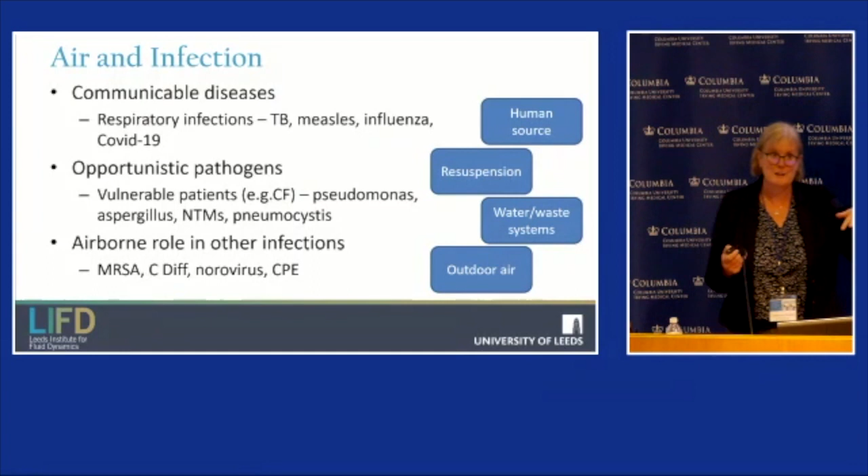So we're not just talking here about human respiratory sources, we're actually talking about sources from water and waste. For some immune-compromised patients, we're talking about outdoor air, we're talking about resuspension off surfaces. And of course, we know that Far-UV can interact on surfaces as well as in the air.

But we have to remember, going right back to the beginning of this conference and the talk that Shelley gave, we have to think of that much bigger picture. So GUV is one of those factors that we can put into buildings, but buildings are designed with a whole raft of different aspects and a whole push and pull of challenges, some of which are there because of regulatory things - net zero, climate agendas, airtight buildings, etc.

Energy is always going to be there. The reason for that energy efficiency will change over time, but that's always part of it. But then there are things that are much more nuanced around human behaviours - things like noise, security of a building. Do you open the windows, or is it secure to do so? What about air pollution inside and outside?

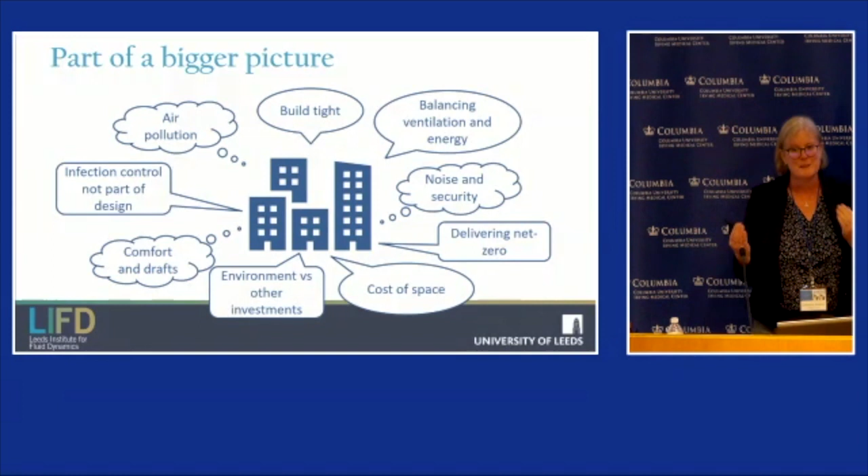And comfort. I don't know if anybody in here has got CO2 monitors. The air quality from a CO2 perspective is really good in here. The temperature looks really good. The humidity looks really good. Is anybody a bit chilly? Yep. So we've got velocities in here which are a little bit too high and you can feel them. So we've got a set of metrics, but they don't always tell us the right things.

So that's the bigger picture space. One of the things in the UK that happened as a result of the pandemic was a piece of work commissioned by our government chief scientific advisor that I was quite heavily involved in. This was led by the Royal Academy of Engineering and called Infection Resilient Environments.

It was a 2-phase piece of work. The first phase was very much emergency - what do we need to do to buildings during the pandemic, what messages do we need to give out to people. The second one was, where do we look to the future?

And we did quite a substantial piece of work around this. We looked with focus groups and expert advice. There was a literature review piece, a research review piece, and a cost-benefit analysis.

The word cloud there, which you can see a little bit of, was some of the issues that our focus groups raised around what poor infection resilience in buildings gives us. Now, bear in mind this was done during the pandemic, so maybe they had a slightly different focus, but there were all sorts of things in there, not just about disease, but things around how it might change things.

For example, you see increased car use. That was public transport, people changing their transport modes and things. We released a couple of documents on this, I can give you the link later. It's a really quite a good read.

But then one of the things that was done as part of it was commissioning a piece of work around the cost benefit of ventilation. This looked at the risks associated with infection transmission, in terms of illness and absenteeism from workplaces and things, versus the cost of putting in improved ventilation. This focused on ventilation rather than cleaning technologies.

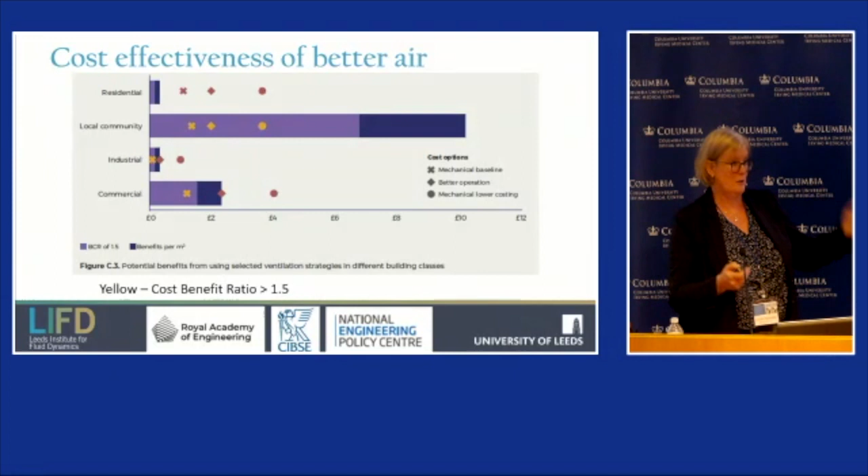So, okay, that takes us, that's that big picture piece. That now takes us into where do we go for Far-UV. And I'm going to go right back to what David said in his talk at the beginning, because ultimately, does it work? Is it safe? Those are the big themes of the entire conference, and that's what we're all really kind of working towards.

And I think, David, you said at the beginning, does it work is almost the first one, because if it doesn't work, the second one is a bit pointless. But we have to know both. And so I'm going to ask the question, well, what do we still need to know? I'm not going to cover everything that we still need to know, because I don't think you could sit there for that long.

But I thought, well, how do we understand Far-UV? Maybe I'm coming to this from my perspective a bit on the work that I've been involved in. We carry out a range of different studies. Some of those are very fundamental, small-scale laboratory studies. How does our microorganisms behave? Or what happens in a very small chamber from a chemistry perspective?

What happens in terms of skin and eye studies, in terms of, again, very controlled settings. And then gradually, we sort of scale it up. Can we go to controlled chamber studies? We go to modeling studies, and then the real world. These get more and more complex and messy as we go through them. So I'm just going to touch on a few points from one or two of these areas.

And the first one I'm going to mention about is inactivation. So a lot of the focus over the past three years has been there because of COVID. We've been looking for, most of us cannot work with SARS-CoV-2, so we've looked for surrogate pathogens. Quite a lot of studies have looked at these. The vast majority of inactivation data is from aqueous solutions or on surfaces.

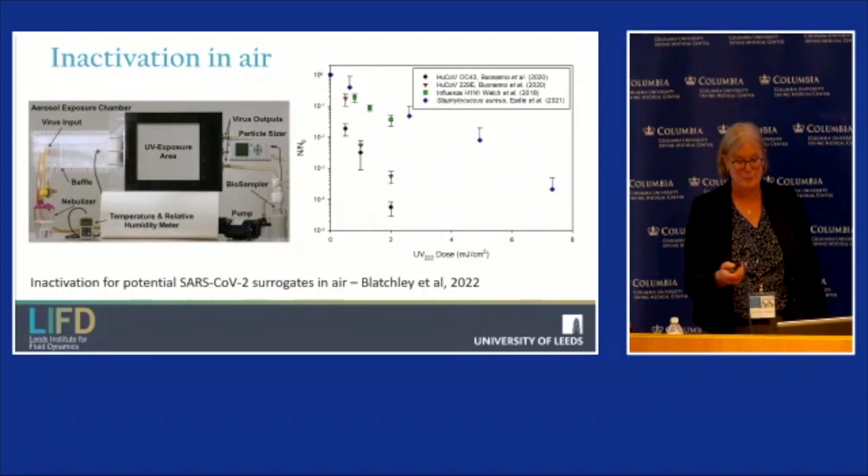And there's actually relatively few microorganisms that have been characterized in air for 222, those which have been a bit more focused around the pandemic space at the moment. We heard earlier in the conference a question about fungi. I haven't seen any fungal data. Maybe there is some out there, but I haven't seen it yet. We haven't really looked at things like temperature and humidity. And if we go back to 254 nanometer, actually there's lots of that characterization happened, but even within that characterization, those flow studies are complex.

As I was putting this together, it got me thinking, and it took me back nearly 20 years ago when I first started working on UV. This was the very first project I ever did, where I was doing computational fluid dynamics models of the flow-through chamber we created in Leeds to determine decay constants for various microorganisms.

In that, we looked at what actually happens in this chamber. What does the flow look like? It was quite nicely laminar in this one, but to start with it wasn't—we had these weird recirculations in there.

On the top right, that's a surface-measured irradiance field that was then put into the model. You can see it's not uniform—you've got this non-uniform distribution.

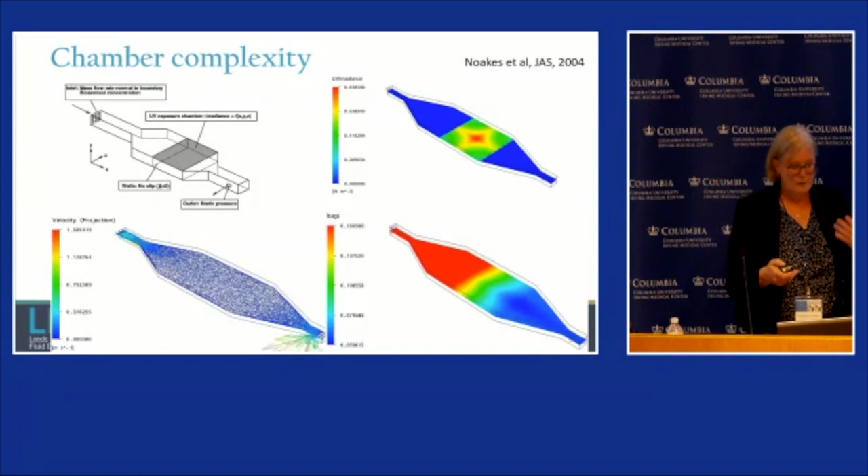So just assuming a uniform fluence rate might not be the case. Actually, in the model, on the bottom right, that's the concentration of microorganisms passing through, and you can see you get a non-uniform disinfection or inactivation rate as they pass through. So the design of the chamber, the flow, and the UV light intensity distribution will determine what inactivation constant you calculate. And that makes it quite a challenge.

So I think this is one of the areas we need to think about, because we need good data for anything we model. Yet how do we compare between different test rigs and different labs? How do we characterize all of those different parameters? There's a huge number of parameters you have to characterize in one of these test rigs to get it right.

Which microorganisms have we done? Which should we be doing to make sure we've got that breadth of information we need? And then what do we suspend it in? Do we suspend our microorganism in distilled water, in Ringer's solution, in bovine serum, in artificial saliva? Do we use a Collison nebulizer that typically generates 2-micron size aerosols, or something else more representative of a human source? What temperature and humidity—do we need variation in there?

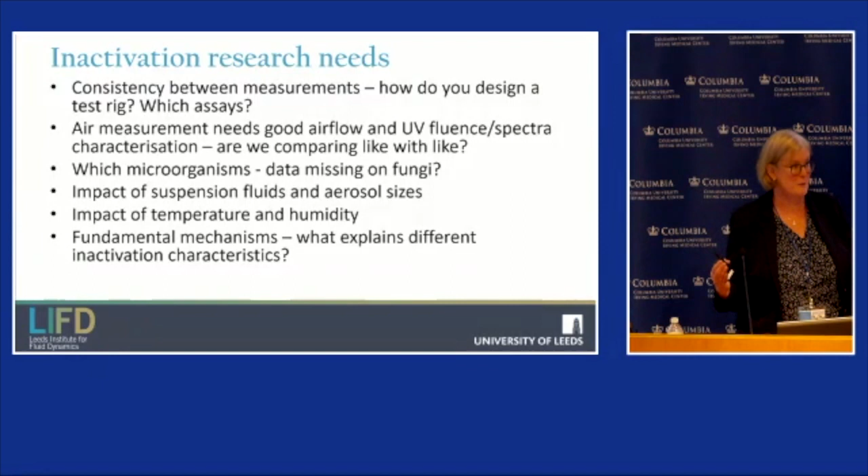And then even within that, we get different inactivations. What are the fundamental mechanisms explaining those? So there's a whole set of questions, all based around what appears to be a simple benchtop experiment, but it's actually a really complex one. That's again why we need to bring all these different places together.

So we've done quite a bit on chambers, room-scale chambers. We can go to room scale. Room scale is great because it's much closer to the real world, but you've still got control over conditions. You can start looking at different lamp placements, room layouts, mock up a hospital room, put different microorganisms in there, and even put some chemical species in there too.

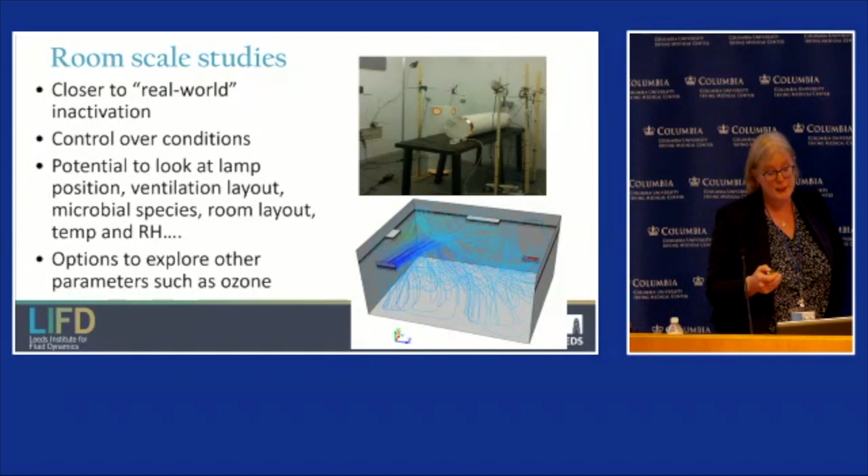These are just a couple of pictures of some of the things we do in our chamber in Leeds—how you do experiments in the chamber.

There are two different ways of doing these. Essentially you are nebulizing a microorganism in—same problem we've got with the Collison nebulizer I mentioned before—but you're trying to determine what happens in there. So we do two different approaches. We usually use what we call a steady state test: we'll nebulize that microorganism into our chamber, which is usually ventilated, so we'll have the mechanical ventilation running.

We take samples when it's under steady state. Even under steady state conditions, we get variation, because the real-world mechanical ventilation isn't steady—it's got fluctuations in it. And it's biological, and as anybody who's done a biological measurement knows, if you measure something you'll get a different answer every time within a boundary. So we get these fluctuations, then we switch our UV lights on, leave it for a little bit, take another set of samples, and we've got two conditions, with and without. Crucially, we keep nebulizing all the way through the experiment, regardless—meaning it represents a room that's continuously occupied, with and without UV.

The second approach is what's often used, probably because of some EPA regulations about demonstrating how we get to 99.9-whatever-percent inactivation—it's a decay test. Essentially you can do a decay in a room, but you have to do a control without a device present to get the natural decay.

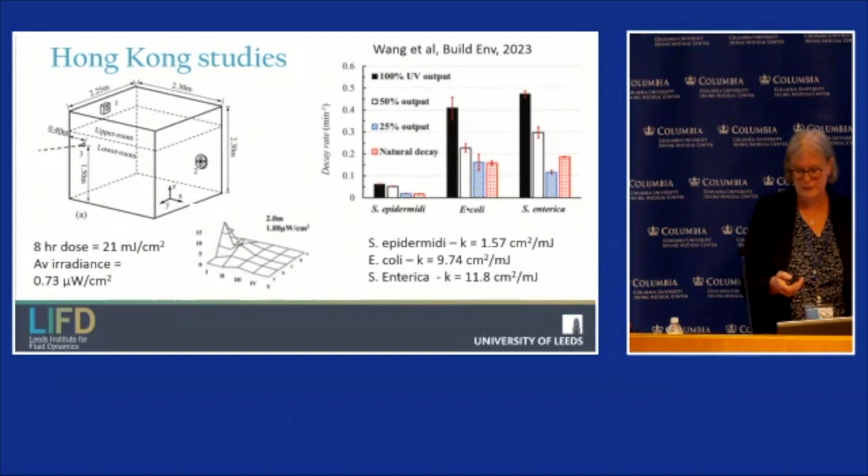And explaining it is really hard. Now, the 2 studies that show that are our chamber, which is ventilated, it's got a mechanical ventilation system, and the air that it's ventilated with is HEPA filtered, but it is just outside air. And the other study is the one that Manuela presented and David alluded to, in the murine virus, which again is a real environment with real air. Everything else is these tightly controlled chambers.

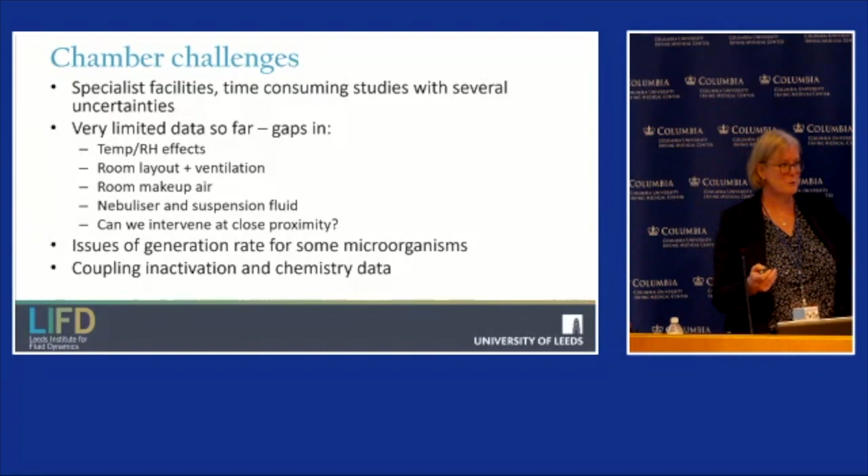And then, of course, we can couple inactivation and chemistry, although I don't know that we can do them at the same time, because when you do an inactivation experiment, you deliberately put something in there that will change all the chemistry for you. So there's a whole set of complexities.

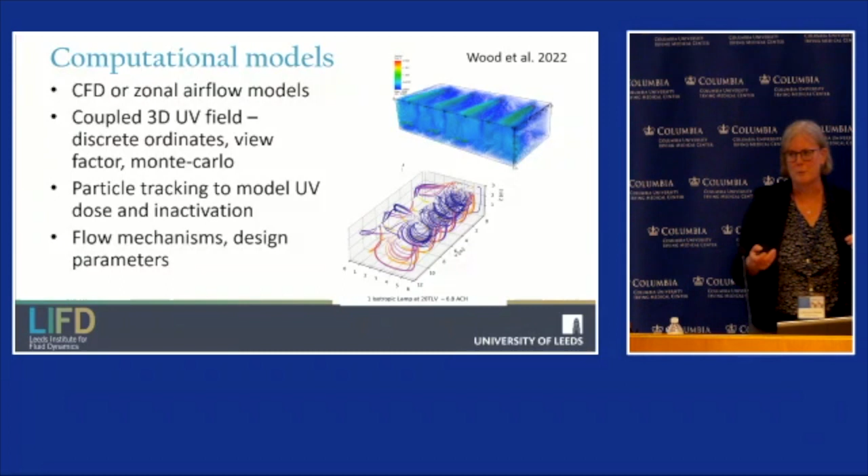I'll touch on modeling. We've seen several people talk about modeling here, usually computational fluid dynamics, sometimes zonal airflow models. Within those, they have some real power because you can put those 3-dimensional UV fields in through different methods, but they'll all give you something fairly similar. You can model tracks of particles, calculate cumulative dose, calculate inactivation rates, and explore factors around design and where people are located in a space. I've just shamelessly stolen a couple of pictures from Kenny's presentations earlier to illustrate this.

But they're challenging. Models are all an idealized version of the real world, and getting the right boundary conditions on your model is hard. They nearly always involve something very static, whereas actually people move about in the real world, and buildings are much more variable and complex. People's emissions are complex. We have changing conditions.

Putting in both inactivation and chemistry together, I think there's some real possibilities in there, but again it requires that expertise to do it. And then, of course, with any model, how do you validate that model and know that it's right? So really teaming up with people who are doing small-scale bench experiments, chamber studies, etc.

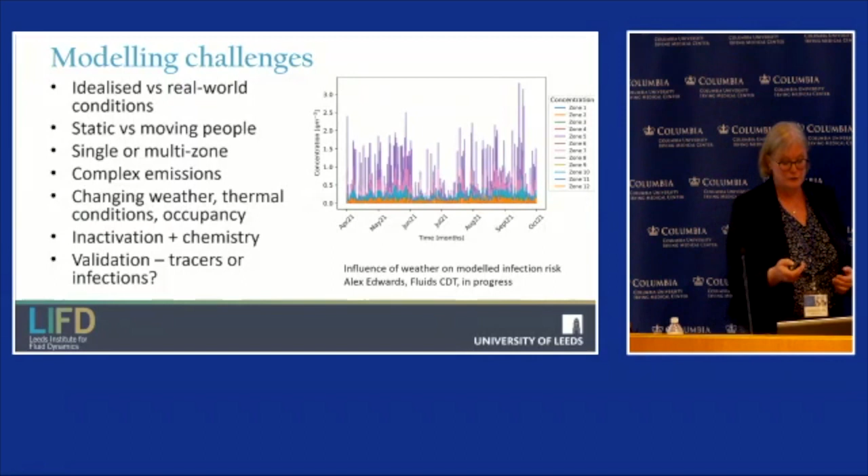I also want to talk about real people breathing out, because the exhalations that we produce—bear in mind we're thinking about respiratory diseases here—everyone's different. We produce this spectrum of particle sizes. We don't just produce 2 micron particles; they range from under a micron to over 100 microns. That size distribution depends on you, depends on how you exhale, depends on the angle of your head, depends on whether you cough or speak, depends on the temperature and humidity of the air, and of course these evaporate.

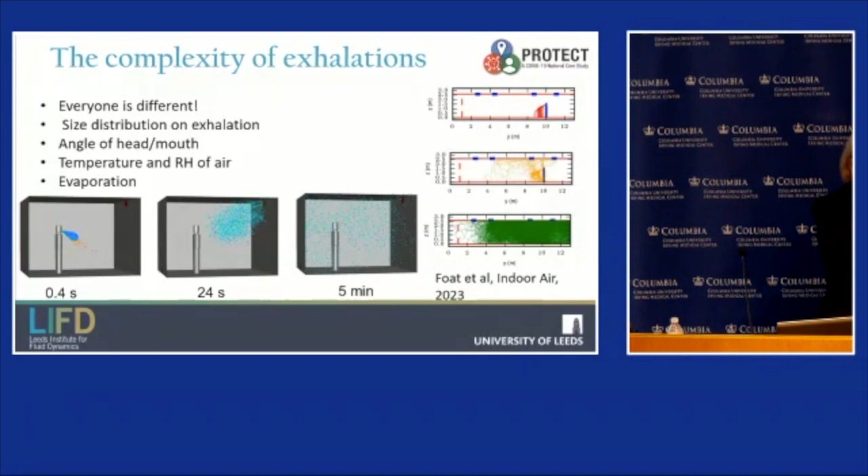This is showing some CFD simulations of an evaporating model. You can see the particles—on the left you get some big ones which deposit out, and then this jet which comes out and goes with the airflow as a buoyant plume and then disperses around the room. On the right, these are little tiny diagrams, but the sort of spike you can see is a person standing and coughing. On the top, these are the really big droplets that just behave ballistically, come out of your mouth and land. On the bottom are the really small ones—they evaporate, become really small, and disperse around the room. And in the middle, you've got this bunch of intermediary particles, some of which deposit, some of which stay in the air. We're not capturing any of that at the moment in any of the models that we're doing in the GUV space.

So now I'm going to touch on the real world, and this gets even more complicated, but we need a whole bunch of different things in the real world. We need to think about the bioburden and the chemistry, as we've heard from several talks. We've got the whole acceptability piece, which Kate's just talked about, and the messaging that comes into that. We need to think about practicalities—how robust is this, can we maintain them, how usable is it. We need that long-term data on people's exposure.

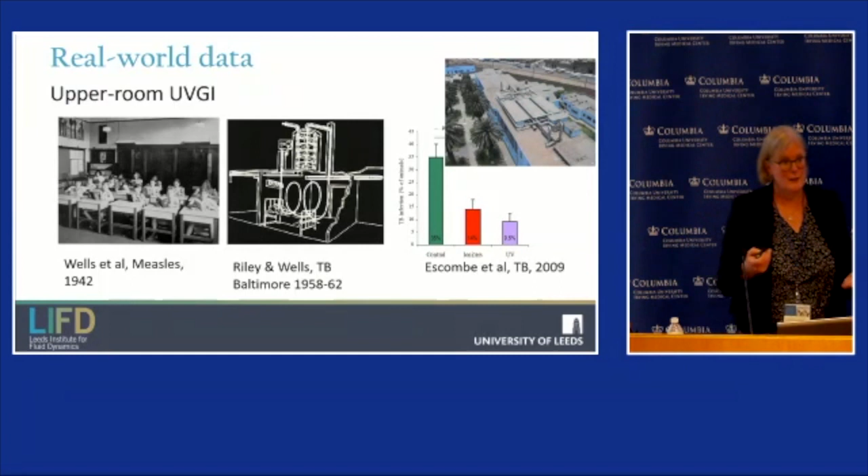And Don talked about this the other day around those challenge studies. So we need to actually measure some infection endpoints here, because we can't just—I think we all know from the bioburden work that it works, but we do need some of those long-term infection endpoints as well. Don alluded to some of these the other day: the Wells studies, TB studies, and most recently the ones around TB in Peru, and there's another one in South Africa, which looked at those measurements—the middle one and the one on the right were human-to-guinea pig studies. The one on the left is the measles study, which is infection rates in classrooms.

We're actually carrying out a study at the moment in primary schools in the UK. This was a pandemic study looking at air cleaner interventions, so HEPA filters and 254 nanometer UV.

It's been a really complex study. We've got 10 schools which are a control group, 10 which receive air filters, and 10 which receive UVC. We intended to do upper room UVC and immediately discovered at least half the schools had too low a ceiling, so we had to put active air UVC into some of those, and we hit regulatory problems.

We are measuring indoor air quality parameters in every classroom, because we need to say whether the ventilation is different in different classrooms. That means we've got something like 540 classrooms which have got air quality monitors in them, and we measure illness absence every week there. And it's been a long study.

We're just in the process of publishing at the moment. I can't tell you the results, but they're looking good. There were complexities of running these and doing this in the real world, putting them into schools where the schools have the control and we don't - it's been a really interesting and challenging experiment. But these experiments and studies need to happen.

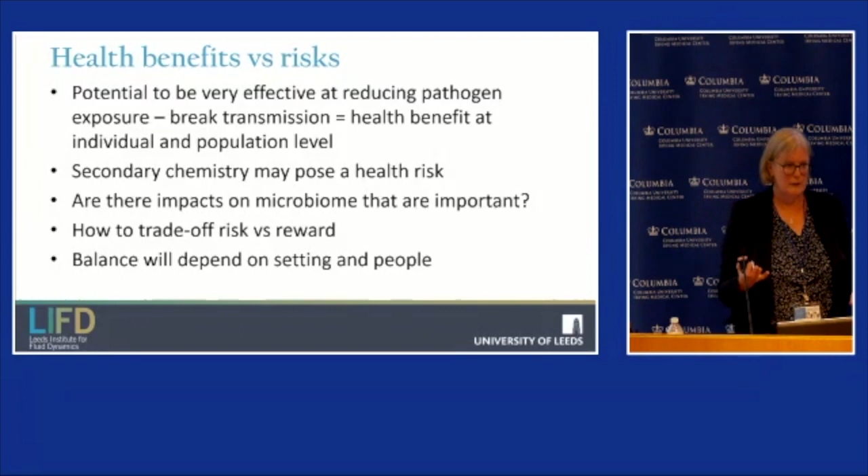Just to think this through a little bit, what about healthcare settings? If you're a patient, you're there usually for quite a short period of time, maybe a few days, but you are in that room, in that hospital for 24 hours a day. Your risk of hospital-acquired infection is quite high.

And that's without thinking about all of the other infection risks in a hospital. Most hospitals, even in the UK, which are poorly ventilated, have some background ventilation that I would say is reasonable. Because of that short duration, maybe your exposure to the air chemistry is quite a short period of time, so perhaps the infection benefits dominate at this point. I haven't calculated it, I'm not sure, but I would hazard a guess that it might.

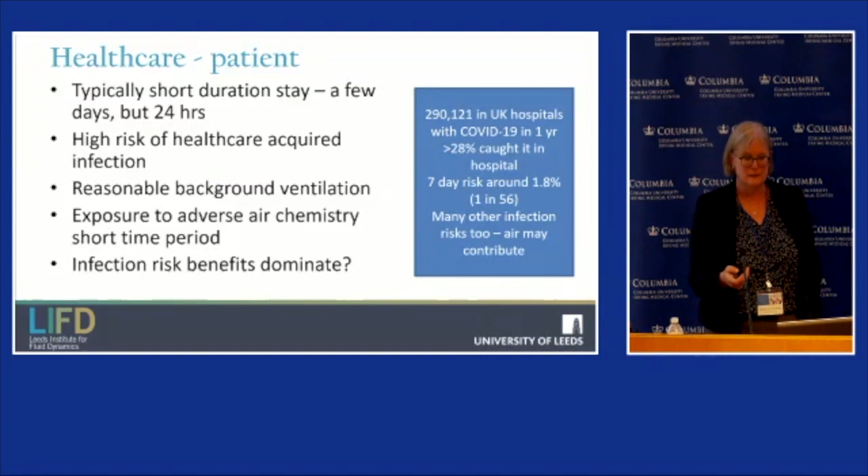But what about if you're staff? You're not exposed 24/7, you're exposed for maybe 6-8 hours a day, depending on how things are set out in a hospital. If you've got a poorly ventilated space, your exposure to the air chemistry could be more significant. And of course, this might go on over many years, but your infection risk's also high.

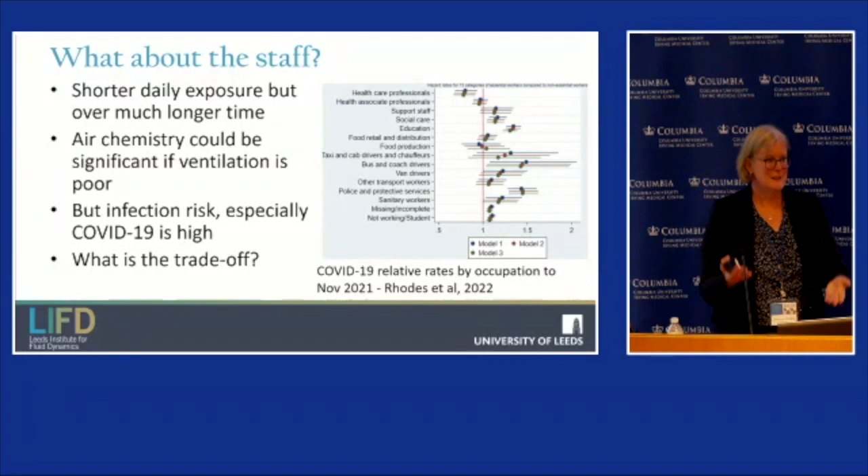If you look at the graph, this is relative rates of COVID-19, healthcare professionals are way higher than anybody else. So if you're a healthcare professional and you're going to catch COVID maybe once every year, maybe every 2 years, for the next 30 years of your working life, where's the trade-off at that point? I don't know. I think that one is a more complex trade-off, but it's not an easy one to bottom out. So we need to be able to do this properly.

I know Jose shared some initial discussion around this and got us talking about this. I think we need to think this through in a more complex way. We can use quantitative microbial risk assessment or quantitative chemical risk assessment approaches.

There's some well-established approaches out there, but thinking about different population groups, different settings, what is that exposure? And then perhaps thinking not just about mortality, but morbidity effects as well in there. Because, for example, COVID-19 - and of course this isn't the only infection we should be thinking about - we've got this challenge of long COVID on top of the acute infection itself.

And of course, what about the next pandemic? We don't know what SARS-CoV-3 looks like yet. Let's hope it's not any worse.

Back to that bigger picture, we need to know more about how this fits with everything. What's the sustainability of it, the impacts on materials, and I don't think anybody's mentioned climate change, but how we use buildings is going to shift. Our air quality is going to shift. We saw from wildfires, that's going to be different. But also disease risks are going to shift. The diseases that we have now are going to be different, and depending on where you are in the world, that risk might be a big significant aspect.

And of course, again, this is from a hospital perspective. Building energy is a very big part of the carbon footprint of hospitals and the healthcare system.

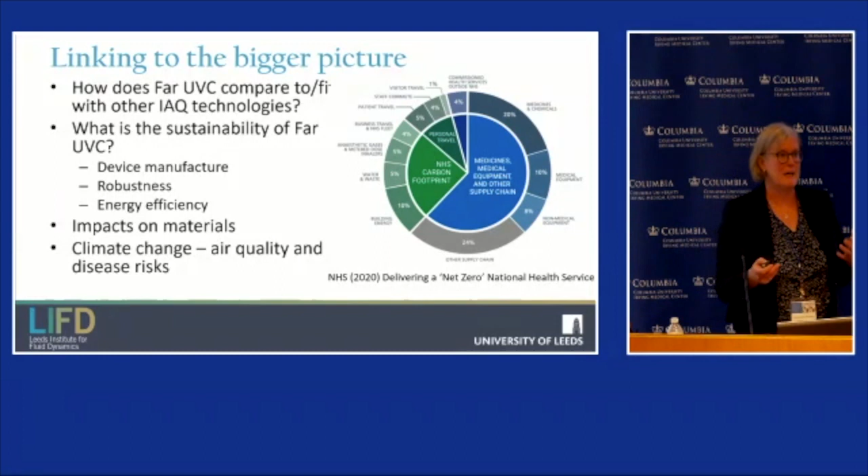We also have to tension this with other air cleaning technologies, and every one of them has its pros and its cons. HEPA filter devices are very easy, safe, etc., but they're noisy, they take up space, and they won't take very much out of the air in comparison to what GUV can do. We know upper room GUV is great, but it can be challenging to put in some spaces. We do have to think a little bit about chemistry on it.

Ionizers, photocatalytic, there's a whole raft of these out there. I'll give you some plus points. They're quiet and they're often cheap, but do they inactivate microorganisms? I don't know. And if they do, they do it by putting a shed load of chemistry into the air, which is a really bad idea. There's a lot of questions on those ones.

And then where we are with 222, we know all the data shows so far it's safe in terms of skin and eye exposure if we do it right. The inactivation looks spectacularly good. I think we need to know a bit more there. It's quiet, but of course we have got that chemistry issue, and it's still an emerging technology, which has a bit of a cost barrier in some places.

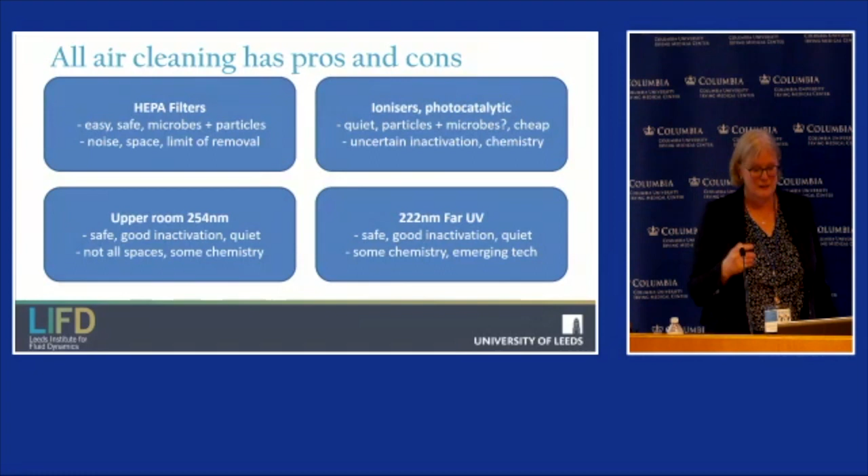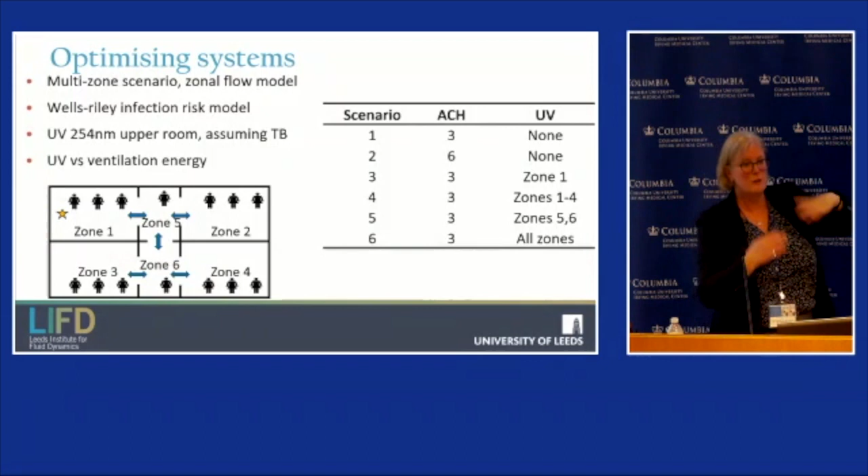If you double the ventilation rate, you reduce your number of cases quite significantly, but you massively increase your ventilation energy costs. If you put your upper room UV in, stick it into just your risk patient zone, you're almost as good as improving the ventilation, but way less energy consumption. And then if we start sticking it into some of the other spaces, we can actually get better than what we'd achieve by ventilation, but again at a lower energy cost.

Now, we would need new data for this, we'd have to do this for 222. I think it'd be quite easy to do, look at different scenarios. But actually, these sorts of things allow us to start to look at those trade-offs and start to think about where those benefits might be.

Last thing I want to say is, can we produce guidance yet? Where are we with this? I'm not sure we're at a point where we can produce an absolute standard on it, but I think we're in a position where we can say a heck of a lot more than we do now about 222.

I think we obviously know what the TLV is, and at the moment the ICNIRP values seem to be a little bit safer in terms of particularly chemistry, but perhaps there's more to go there.

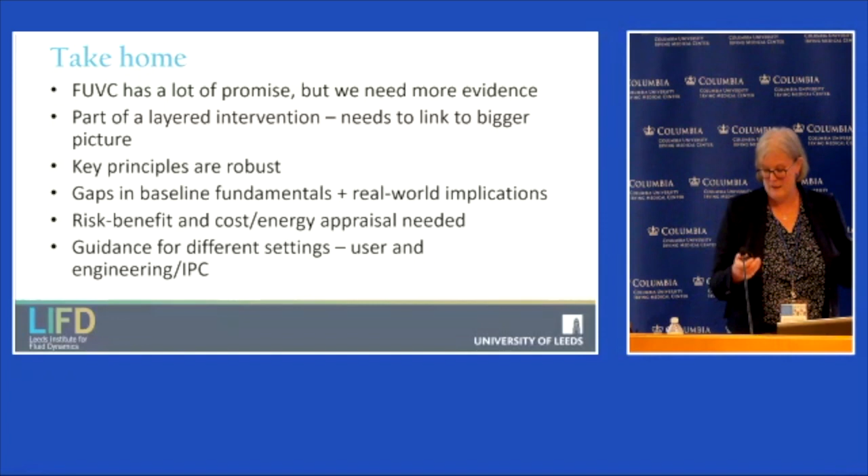But we need everybody here. The brilliant thing about this conference is all the disciplines have been in the room. We've not just focused on a biological aspect or on a safety aspect. We've brought everybody together, even the bits which I'm sure every one of you has sat in a presentation and gone, that went over my head. Yeah, because all of us have had that bit where we've been outside of our comfort zone. But that's the beauty of what we've done here.